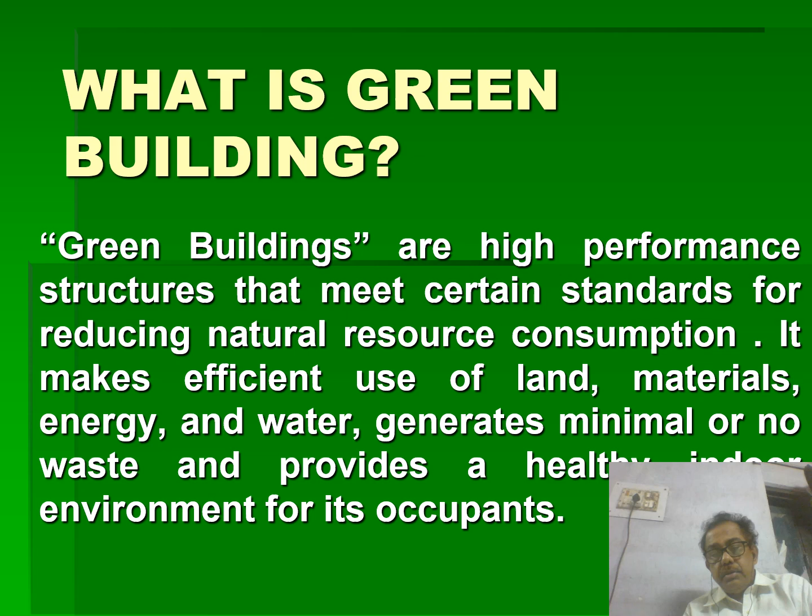Now, how to characterize the green building? What are the characteristics that a building can be designated as a green building? First of all, efficient management of energy and water resources, management of material resources, waste reduction, reduction of impacts of construction on environment, and restoration and protection of environment quality. Enhancement and protection of health and indoor environment quality, and reinforcement of natural system of ventilation.

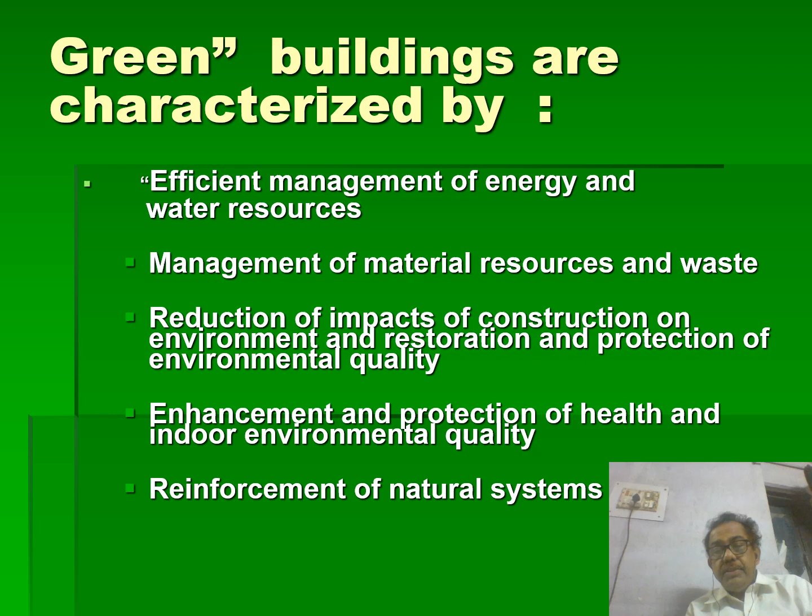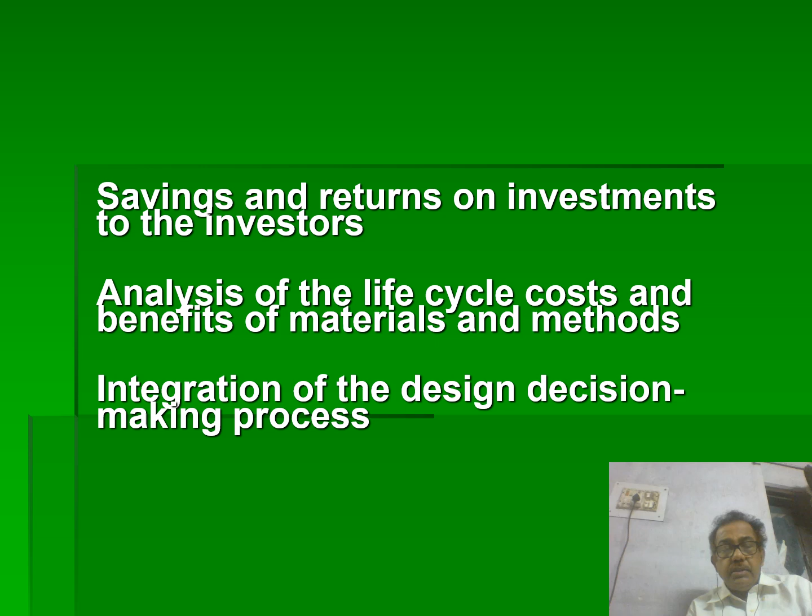Savings and returns on investments to the investors. Green building, although we are calling it an eco-friendly building, but from the point of view of the cost of construction, it is economical - that means the cost is also lower, a low cost type of building. Analysis of life cycle cost and benefits of materials and methods will be discussed. Integration of the design decision making process.

Now, what is the goal of the green building? The green building requires less energy, water, and is healthier for inhabitants when it is complete and in use.

And what are the features? Air ducts for efficient and healthy air flow insulation - that means the ventilation part. Windows designed for maximum daylight. Passive solar control, so solar panels are there, solar cells, photovoltaic cells are there, heat exchanger for climatic control, and obviously the location.

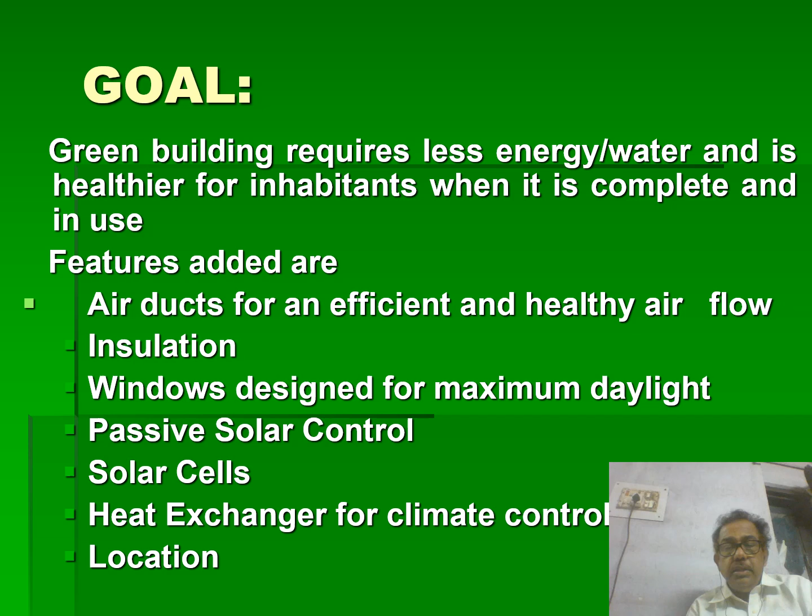So there are rating systems by which green buildings are rated - that means the building which is designated, who are rating the green building. GRIHA, a very popular rating system, that is the Green Rating for Integrated Habitat Assessment. TERI, the Energy and Resources Institute.

SVA GRIHA, matlab small versatile affordable GRIHA. GRIHA and SVA GRIHA are promoted by the Association for Development and Research of Sustainable Habitats, established jointly with the Ministry of New and Renewable Energy.

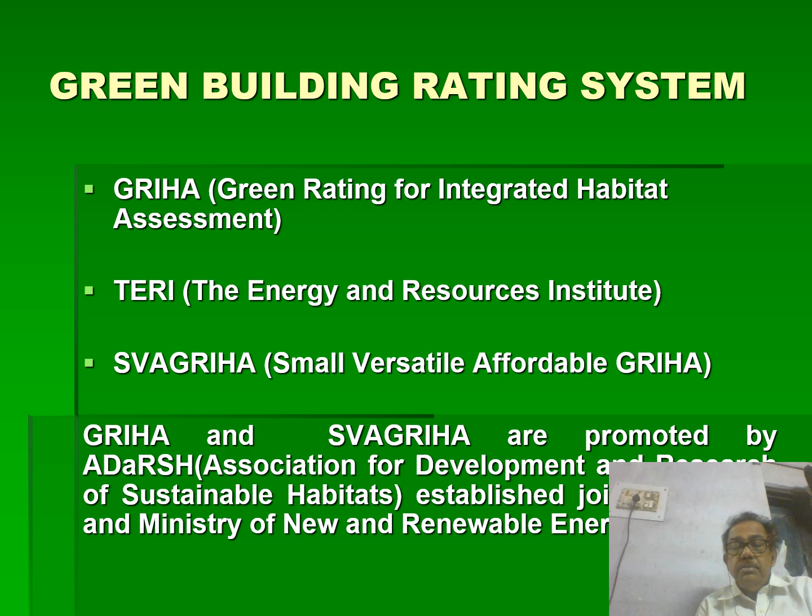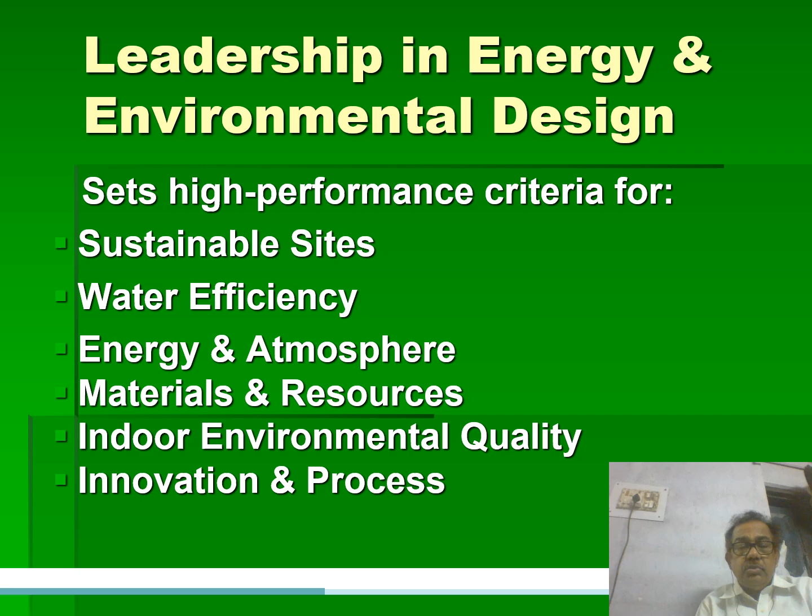Now the leadership - LEED, who are pioneers in the rating system of green building. The full form of LEED is Leadership in Energy and Environmental Design. They set high performance criteria for sustainable sites, water efficiency, energy and atmosphere, materials and resources, indoor environmental quality control, and innovation and process.

Now, what is the green building material? The green building material - a material can be considered green if it is made up of renewable material, and so its cost will be minimum. It has low energy utilization in its manufacturing as well as its functioning. It is easily recyclable. It is efficient in the long run.

What are the advantages of green materials? Improved energy conservation, improved indoor environment, air quality, occupant health, reduced operation cost, and lower environmental impact.

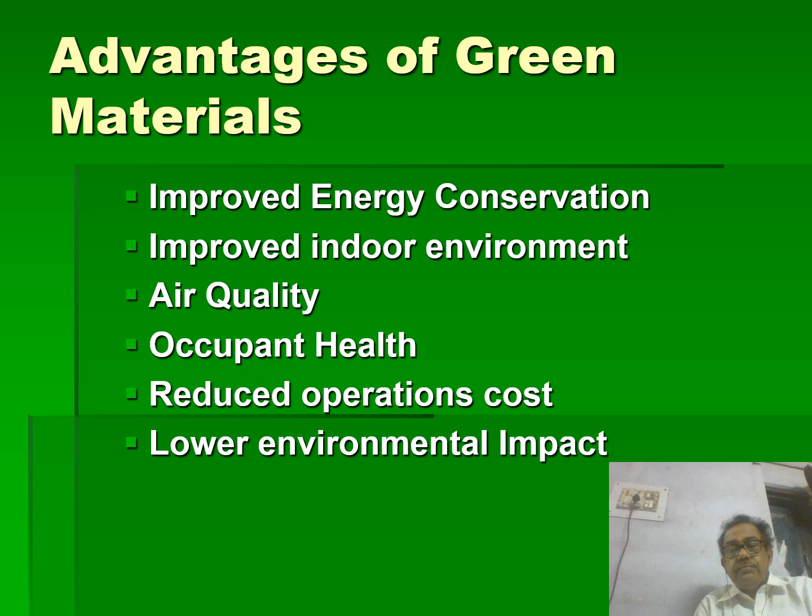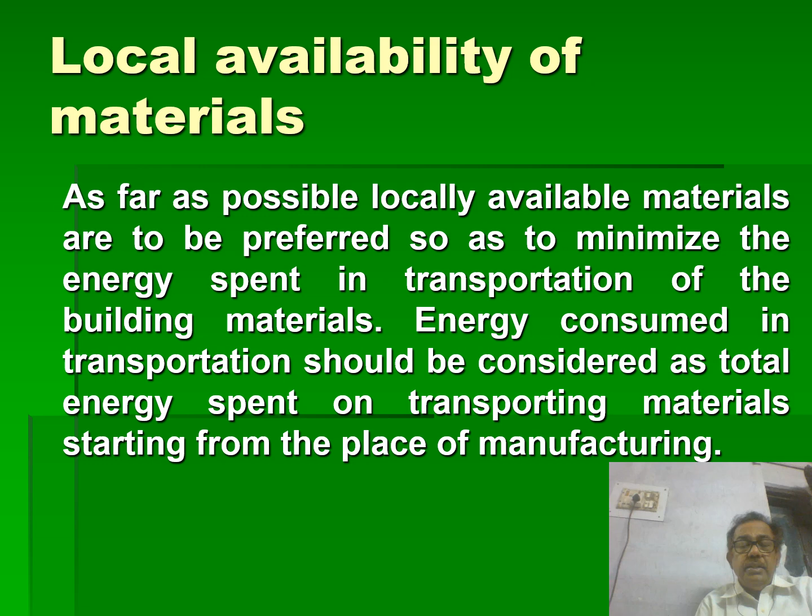Local availability of materials is very important, because if the location is too far, the transportation distance will be more. More transportation distance means more fossil fuel combustion, so pollution will be created in the atmosphere, like air pollution. So the material should be locally available and selected for the selection site of the building, so that the energy requirement is less - that means transportation time and travel will be less, so fossil fuel consumption will be less, so energy requirements also will be less.

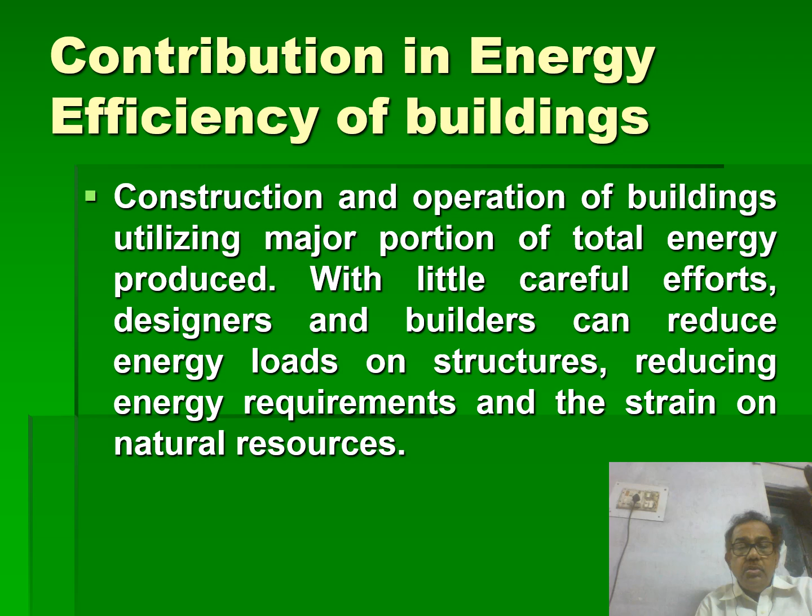Now, with proper orientation of the building with reference to solar radiation to receive maximum daylighting, operable windows for natural cross ventilation, use of passive cooling techniques eliminating or lessening the need for air conditioning, walling units with lower U values, roof insulation - these are used for lessening the energy, for reducing the energy in the green building.

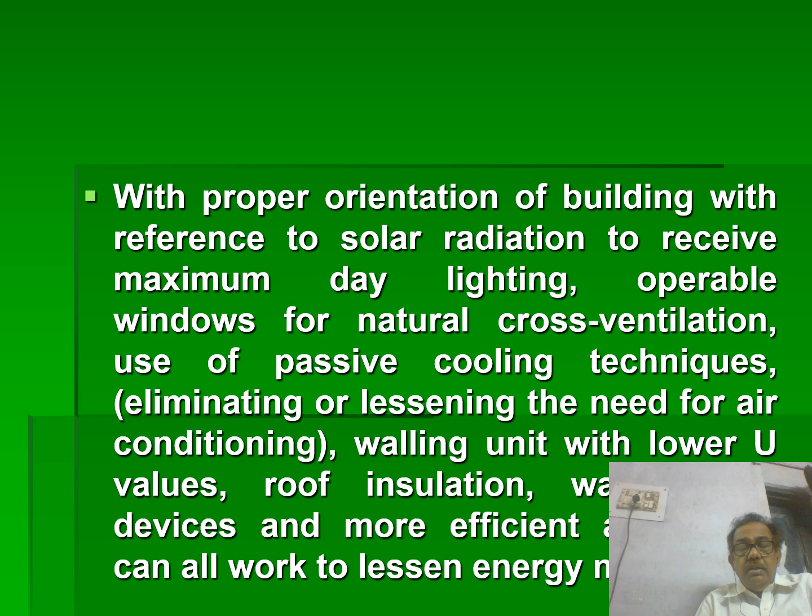Alternate energy sources, that means renewable energy - if I am talking wind energy, solar energy, tidal power - these are the things which can help alleviate reliance on traditional fossil fuel sources.

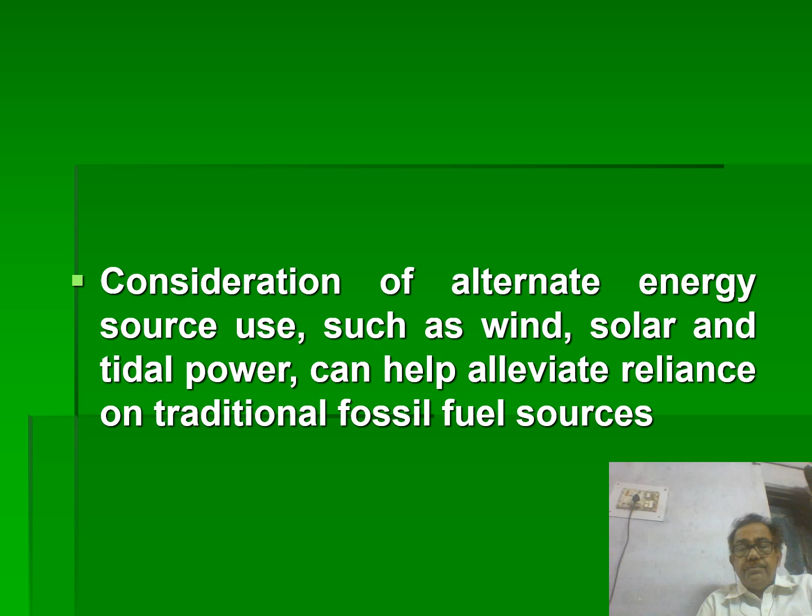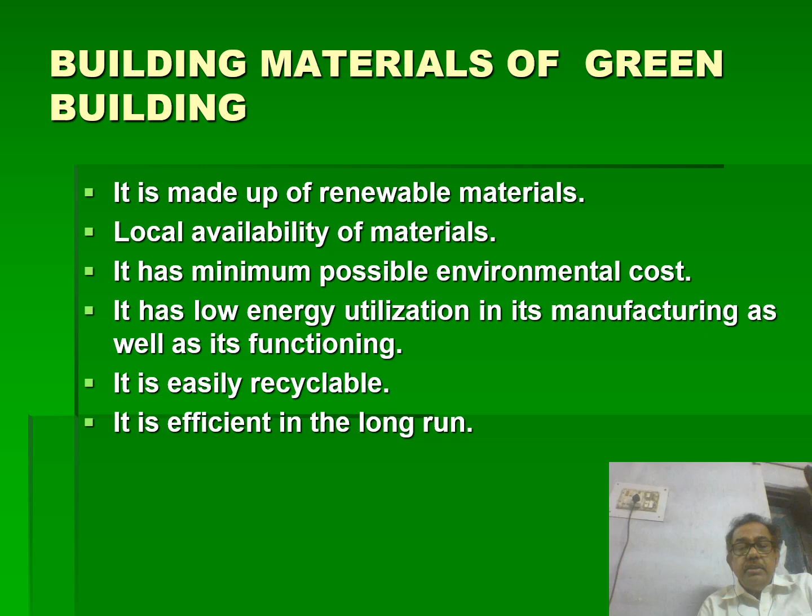Building materials are made up of renewable materials. Local availability of materials should be preferred, so that the distance for carrying materials is less. It has minimum possible environment cost, meaning it impacts the environment less. It has low energy utilization in manufacturing as well as functioning. It is easily recyclable and efficient in the long run.

Now there are industrial waste materials which are used in green building construction, like fly ash. Fly ash is a waste material produced in the power plant, from the electrostatic precipitator, the residue we obtain in the power plant, that is fly ash.

With fly ash, we now make building materials like bricks. Earlier it was the red clay mud brick, but nowadays it is the fly ash brick. The components of the bricks are fly ash, sand, and cement, so fly ash forms the majority part used in construction of bricks, giving us the black fly ash brick. Fly ash can also be used as one component of cement as per IS code, and can be used in filling of buildings.

GGBS, ground granulated blast furnace slag - the blast furnace is basically where iron is melted to produce steel in the steel plant. The blast furnace slag is the waste material, and ground granulated blast furnace slag, GGBS, is a byproduct from the blast furnace used to make iron, which is also used in green building.

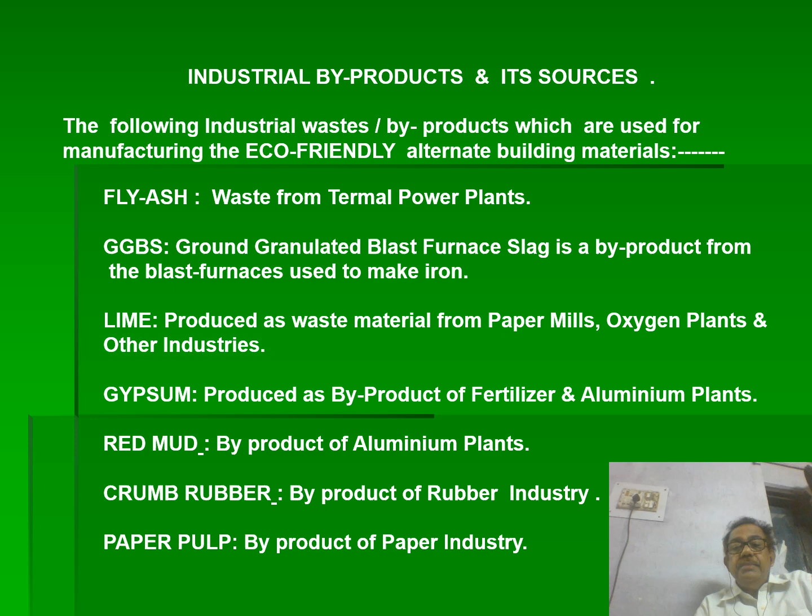Red mud is a byproduct of aluminium plants. Crumb rubber is a byproduct of the rubber industry. Paper pulp is a byproduct of the paper industry. These are industrial byproducts, meaning waste materials which can be used as eco-friendly alternate building materials.

This is the photograph I am showing you, the fly ash brick. In India, approximately 100 million tons are generated per year.

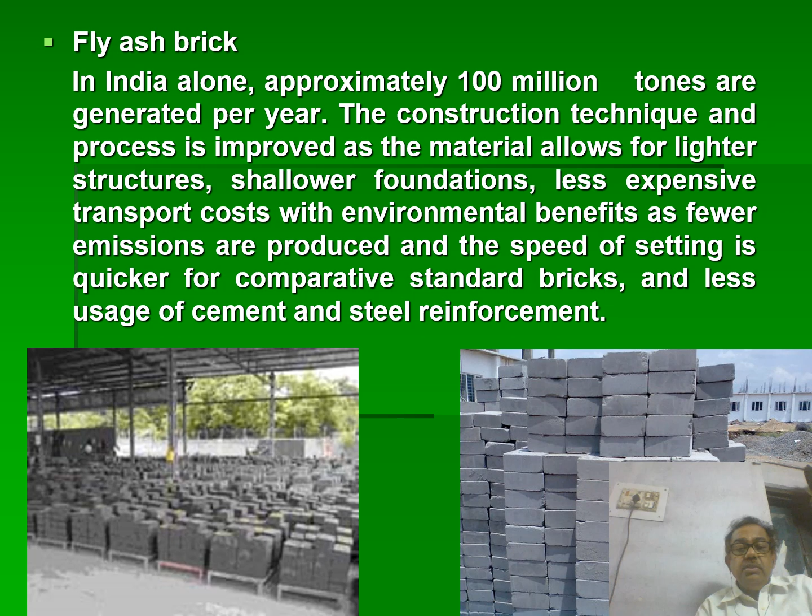The construction technique and process is improved as the material allows for lighter structures, shallower foundations, and less expensive transport cost, with environment benefits as fewer emissions are produced. The speed of setting is quicker compared to standard bricks, and there is less usage of cement and steel reinforcement.

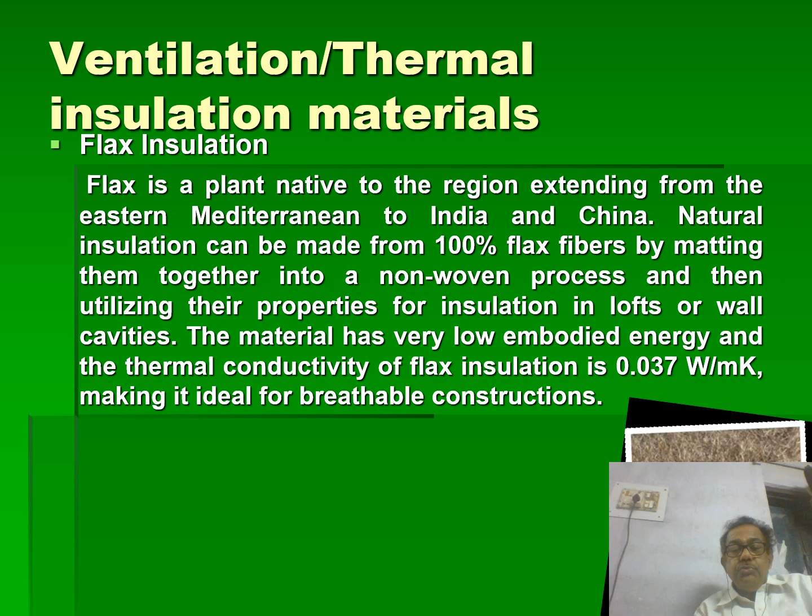Ventilation thermal materials - we also use flax, which comes from the eastern Mediterranean to India and China. Natural insulation can be made of 100% flax fibers by matting them together in a non-woven process and utilizing their properties for insulation in lofts or wall cavities. The material has very low embodied energy, and the thermal conductivity of flax insulation is 0.037 watt per mk, making it ideal for breathable construction.

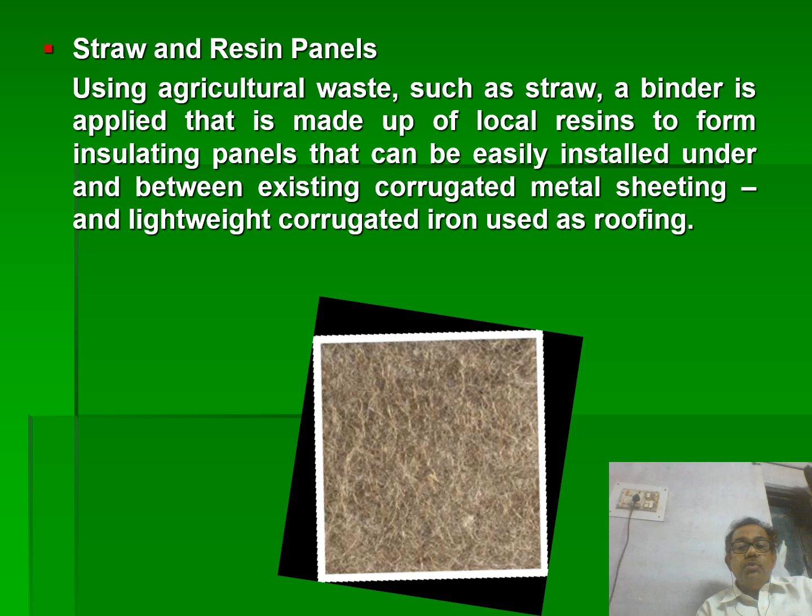These photographs show straw and resin panels using agricultural waste. These are all waste materials where a straw binder is applied, made up of local resins, to form insulating panels used in buildings.

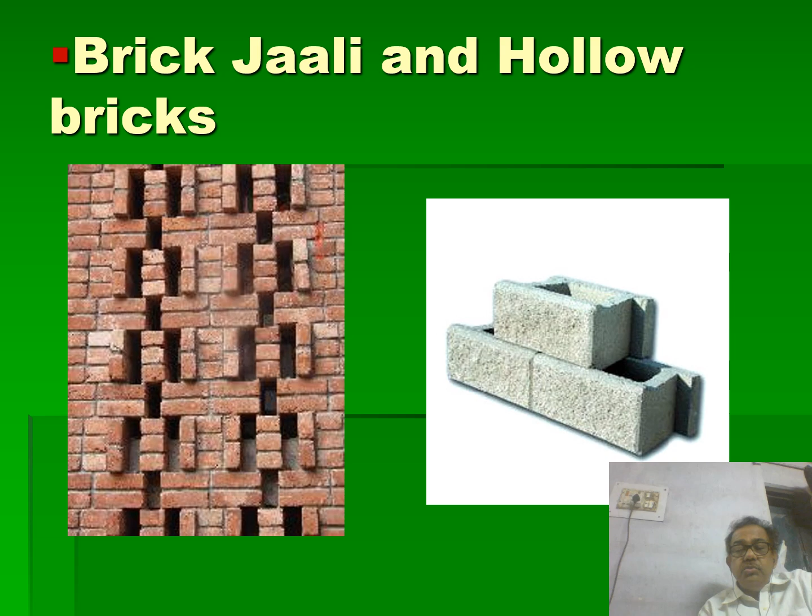This is the brick Jaali and hollow bricks. Brick Jaali is used for ventilation purposes. I am showing you how they are used in green building, and the hollow brick acts as insulation, which can also be seen in the picture.

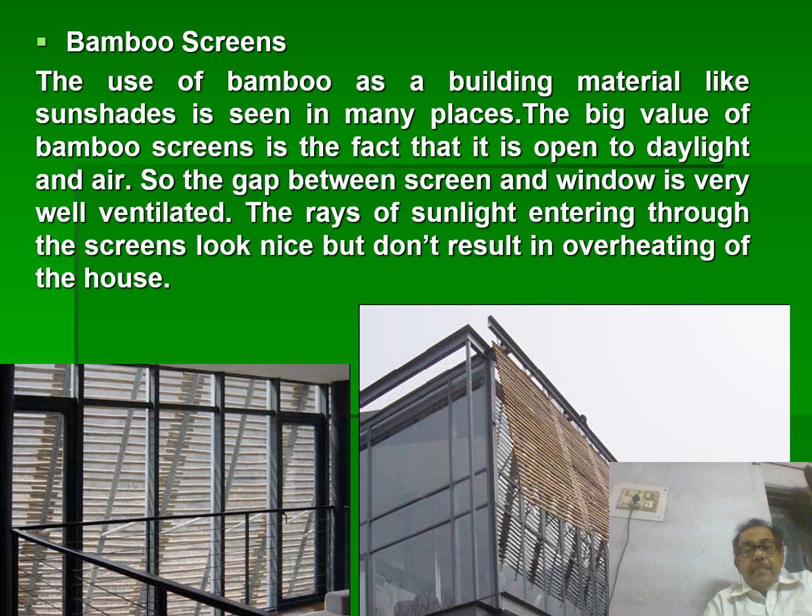Fenestration and glazing is provided for the purpose of heat gain, daylighting and ventilation. Their pattern and configuration form an important aspect of building design and its energy requirement. Appropriate design of openings and shading devices helps to minimize or allow the effects of sun and wind into the building. Ventilation lets fresh air in and hot air out, resulting in cooling.

Glazing is generally transparent to solar radiation but opaque to long wave radiation. These characteristics can be used to heat a building interior by promoting heat gain. This is desirable in winter but may cause overheating in summer. This overheating through large aesthetic-driven areas of exposed glass is commonly observed in commercial buildings in India today, and in turn results in excessive loads on air conditioning systems.

So for avoiding gain of heat during summer, window size should be kept optimum with the proper glass. For example, in Ahmedabad, the number of uncomfortable days in a year can be reduced by as much as 35% by properly glazing the window.

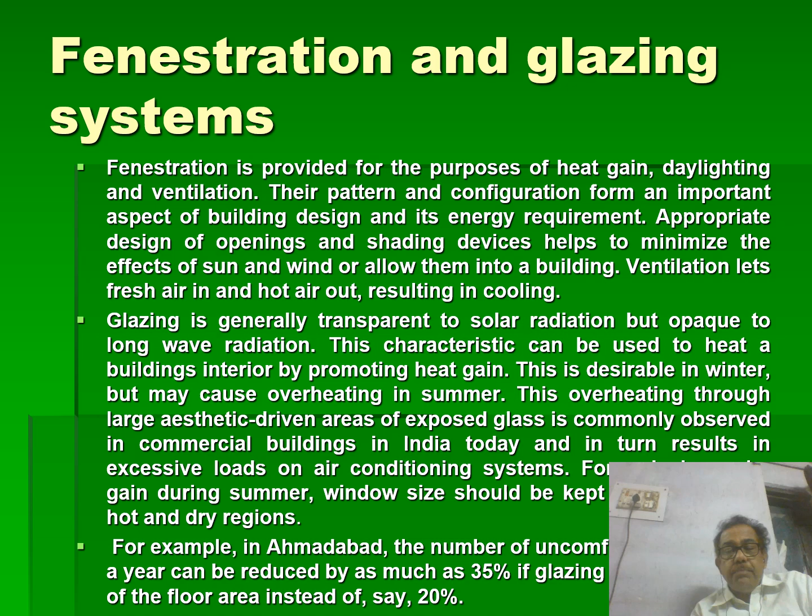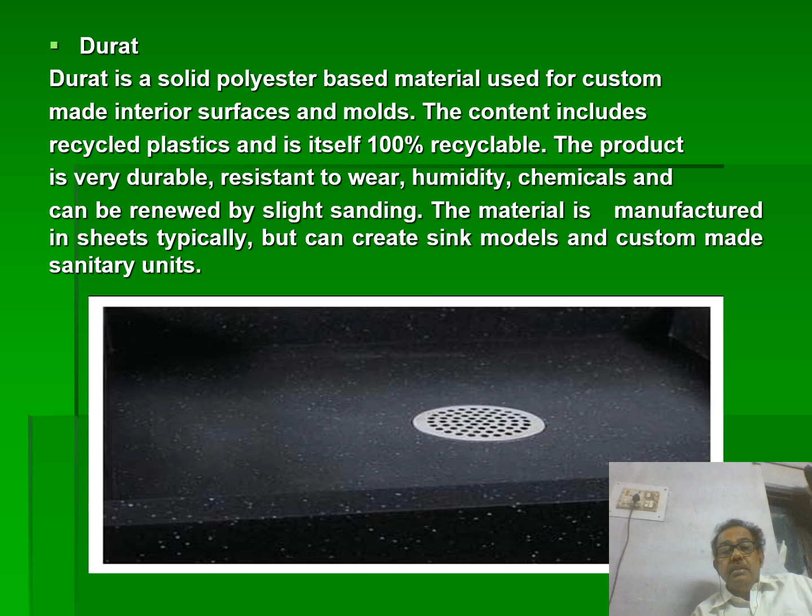Durat is a solid polyester based material, a plastic waste product used for custom-made interior surfaces and molds. Earlier we used to use materials like stainless steel, mosaic or stone basin in the kitchen, which we technically call sink, but nowadays a waste material product like Durat, a solid polyester plastic product, is used. The content includes recycled plastics and it's 100% recyclable. The product is very durable, resilient to wear, humidity, chemicals, and can be renewed by slight sanding. The material is manufactured in sheets typically, but can create sink models and custom-made sanitary units.

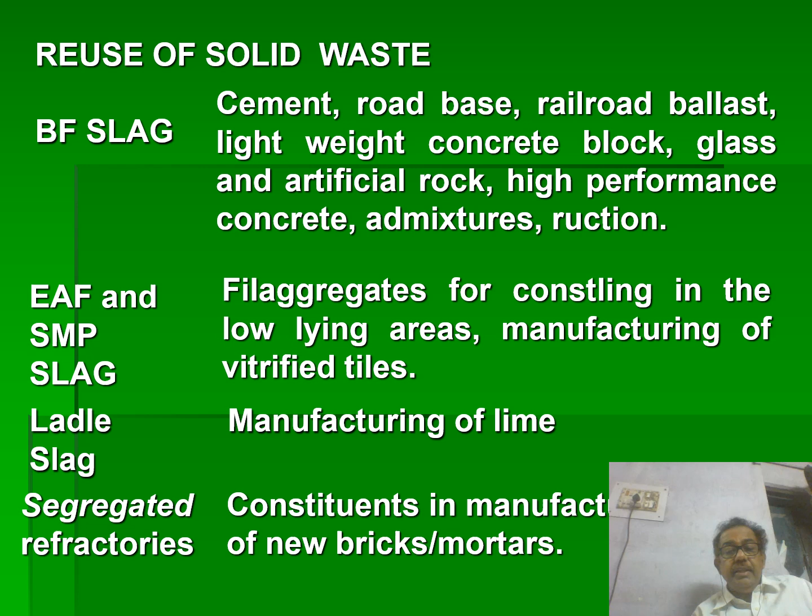The use of solid waste, blast furnace slag, can be used in cement, road base, railroad ballast, lightweight concrete block, glass and artificial rock, high performance concrete admixture reactions, EAF and SMP slag. It is used in low-lying areas, manufacturing of vitrified tiles. Ladle slag is used in manufacturing of lime. Segregated refractories constituent is used in manufacturing of new bricks and mortars.

So in conclusion, the importance of smart buildings has come with the increasing levels of sophistication in technology, communication and connectivity. This controls environment and communicates with users. The difference between green building and smart building is that we are using so many sensors and Wi-Fi systems, where sitting in far places we can monitor what is happening in the building. An integration between green building, smart building and people-friendly developments is essential.

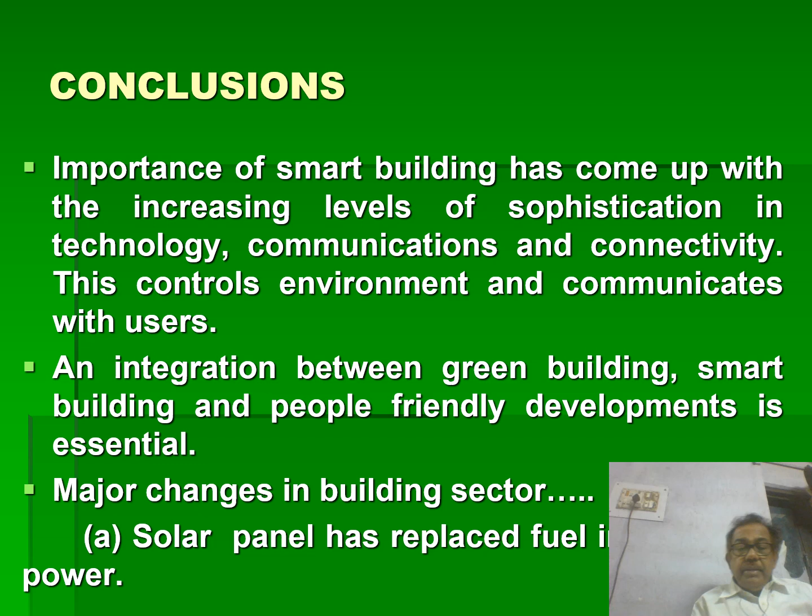The major changes in the building sector: solar panels have replaced fuel for electricity through photovoltaic cells, utilizing natural sunlight in an effective manner and reducing power cost. That's why glazed windows as much as possible are recommended in green buildings for admitting sunlight and reducing electric energy cost.

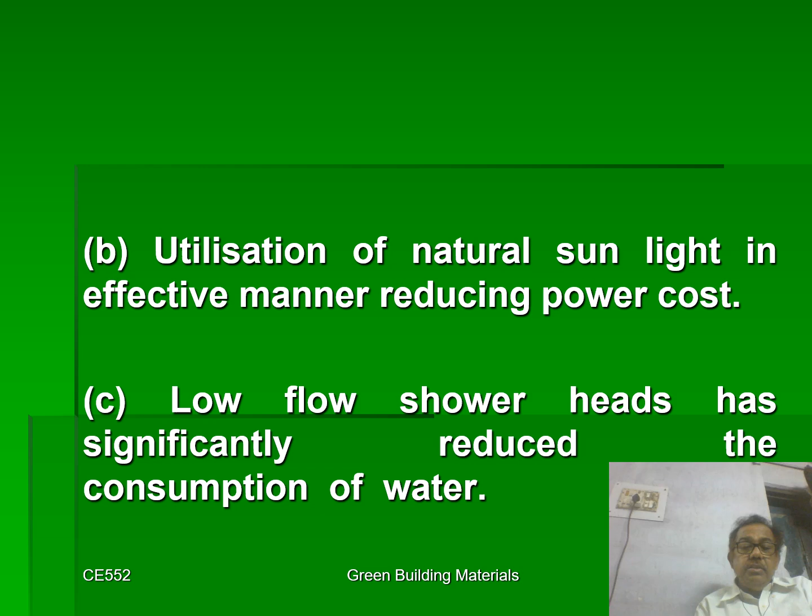Low flow shower heads have significantly reduced the consumption of water. Conservation of water usage is maintained by rainwater harvesting and wastewater treatment plants. By providing a wastewater treatment plant, the treated wastewater can be used for miscellaneous purposes, thereby reducing requirement and saving the cost of energy for water. Power cost is also reduced, because potable drinking water will be used as supply water, while other miscellaneous water needs can use treated wastewater, thereby conserving water.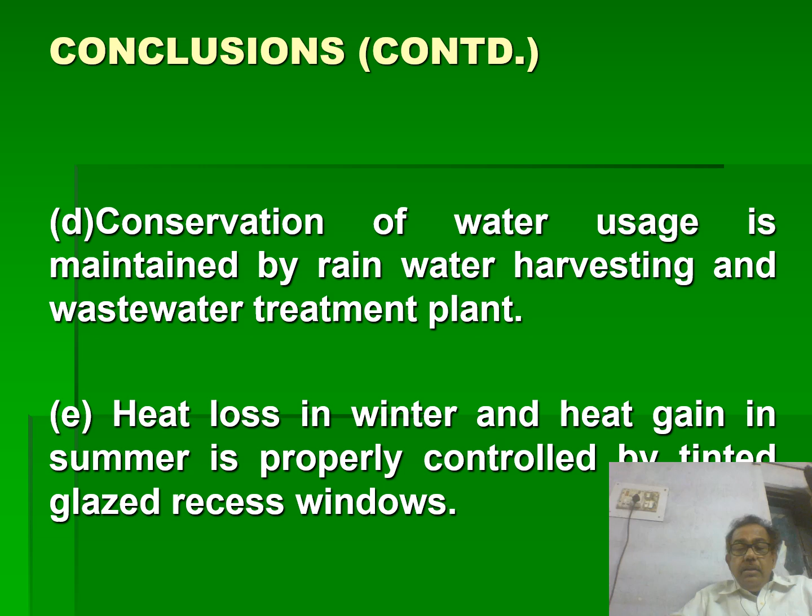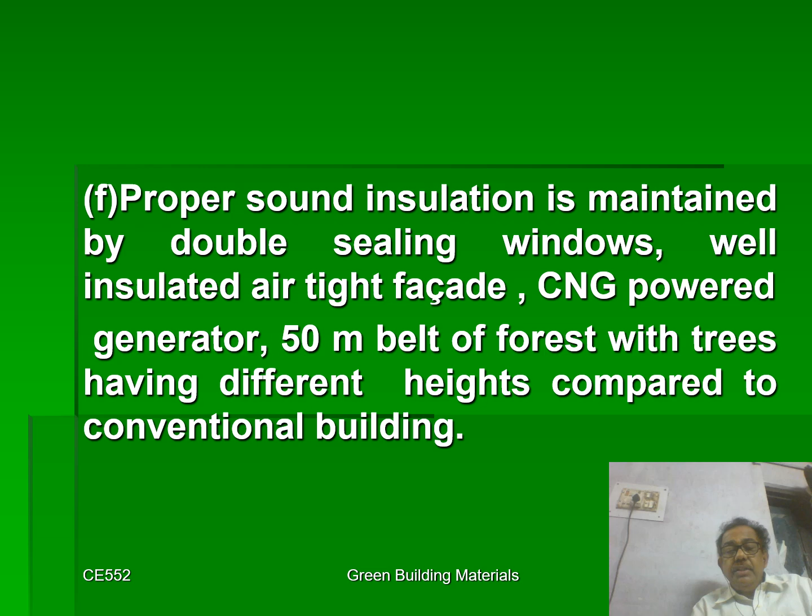Heat loss in winter and heat gain in summer is properly controlled by tinted glazed recess windows, that is the glazing system. Proper sound insulation is maintained by double sealing windows, well insulated airtight facade, CNG powered generators, and a 50-meter belt of forest with trees of different heights compared to conventional buildings. Hollow bricks, as previously seen, have a gap in between that acts like an insulator, keeping the room cool in summer and warm in winter.

Green buildings reduce energy consumption by at least 40%, because we know we can save 40% of the energy in the building sector. That's why it is a very important aspect of green building in terms of energy reduction.

So these are the examples I am showing you. Thank you for your patience. This is just the concept of green building that I have given to all of you. Thank you.